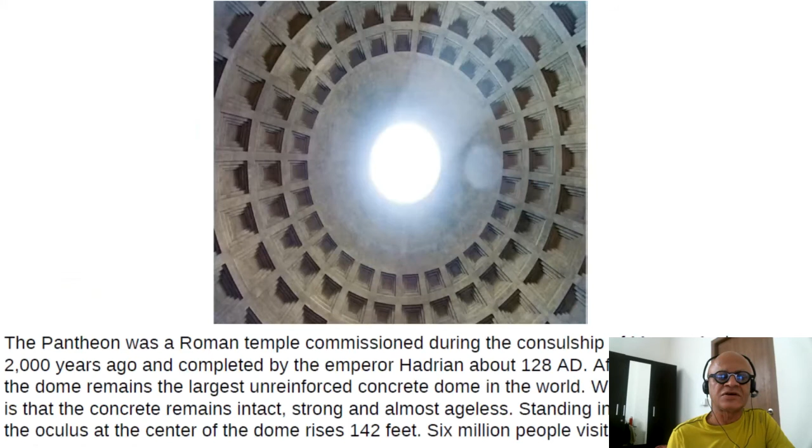Cement has been around for a long time. From the Roman Empire, the Pantheon was a Roman temple commissioned during the consulship of Marcus Agrippa 2000 years ago and completed by Emperor Hadrian by 128 AD. After nearly 2 millennia, the dome remains the largest unreinforced concrete dome in the world.

What is more remarkable is that the concrete remains intact, strong and almost ageless. Standing in what is now a church, the oculus at the center of the dome rises 142 feet. 6 million people visit it every year. Apparently the use of volcanic ash is what made it survive underwater, and current concrete wouldn't last this long, apparently. I don't know the details.

Annual CO2 emissions from cement in 2019, you can see the numbers here. China and India are going absolutely crazy with new buildings because of all the economic development and infrastructure, so they are obviously emitting a lot. They are producing a lot of cement and emitting 500 million to 1 billion tons of CO2. Maybe India is in the range of 100 to 500 million.

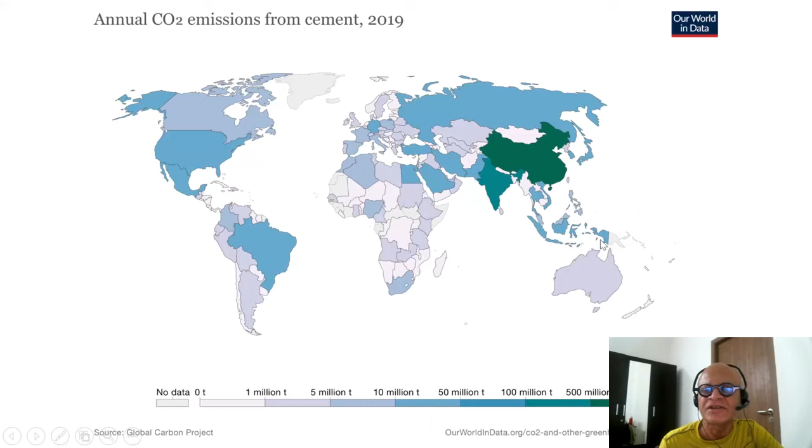And then there are other countries, rich countries, that are still having many buildings, infrastructures, and Brazil, Mexico, and some Middle Eastern countries, Russia and Southeastern countries, and so on, at various levels of emissions. Let's run through an infographic from Carbon Brief that I stole from the website. Reducing emissions from cement is the goal here.

So what is cement? Cement is the basic ingredient of concrete, the most widely used construction material in the world. So concrete is a mix of crushed rocks and sand and so on, which is held together by cement. Around 8% of global CO2 emissions come from cement production. Typically, over half of cement CO2 emissions come from making clinker, one of its major components.

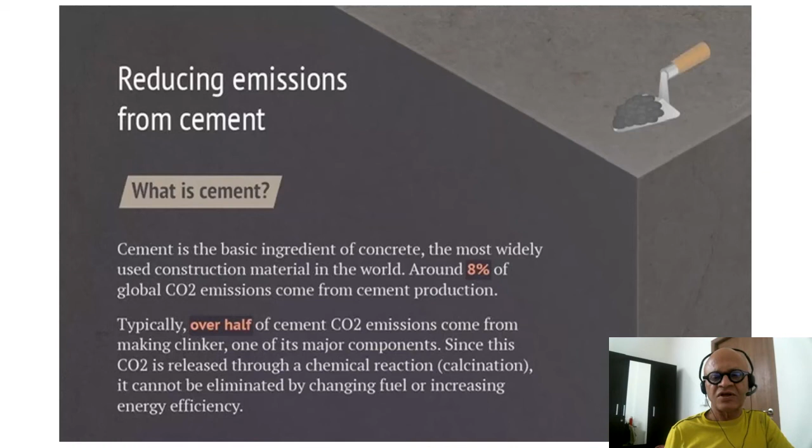Since this CO2 is released through a chemical reaction called calcination, it cannot be eliminated by changing fuel or increasing energy efficiency. So basically, limestone CaCO3 is blasted in a furnace, in a kiln, to remove carbon, which is converted to carbon dioxide and released. Carbon capture and sequestration is one idea, of course, but to get calcium oxide out of limestone, this process is calcination, which is very carbon emission heavy.

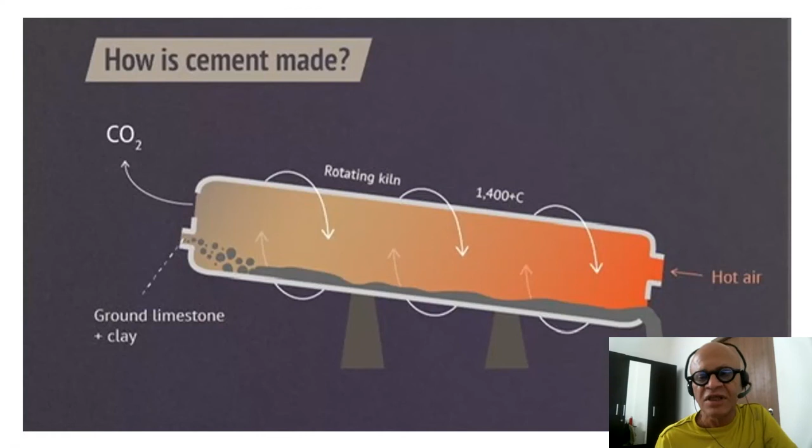Cement is made here, ground limestone and clay with the rotating kiln at 1400 plus degrees centigrade. Hot air is pumped in, and you get the clinker that's coming out here on the other side. And the Portland method is the most common method, which we won't get into. It's often referred to as Portland clinker. How can emissions be reduced?

So carbon capture and storage, as I said, emissions from cement kilns could be captured and stored. However, CCS technologies remain at the basic research and demonstration stages, and no effective scalable CCS has been applied for cement or clinker production yet.

Alternative novel cements include development of clinker-free cements, which could significantly reduce emissions. Some firms developing these claim up to 90% emissions reduction, while others say cements could even sequester carbon, so you can make them absorb CO2 from the atmosphere. So this is from Chatham House, reflected on Carbon Brief.

There are clinker substitutions. A proportion of clinker can be replaced with other materials such as fly ash and blast furnace slag, but this reduction of emissions is barely 5%, and I don't think it crosses even 10% at any rate.

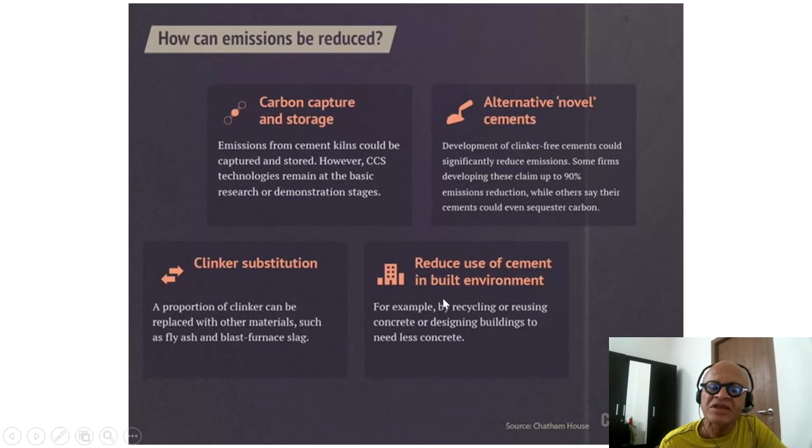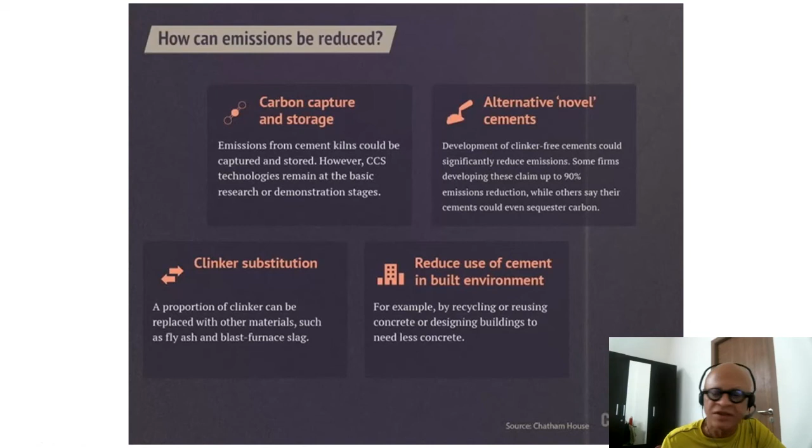Reduced use of cement in built environment, for example, by recycling or reusing concrete, or designing buildings to need less concrete. There are people who argue that steel could replace concrete and no need to use concrete, and so on and so forth, but no indication that concrete is going to be outmoded anytime soon.

To look at some more numbers in addition to the map we looked at from Our World in Data, million tons of cement produced here. Obviously China dominates. India is up here as well. EU, US, Turkey, and then rest of the world combined to be more than these big individual producers.

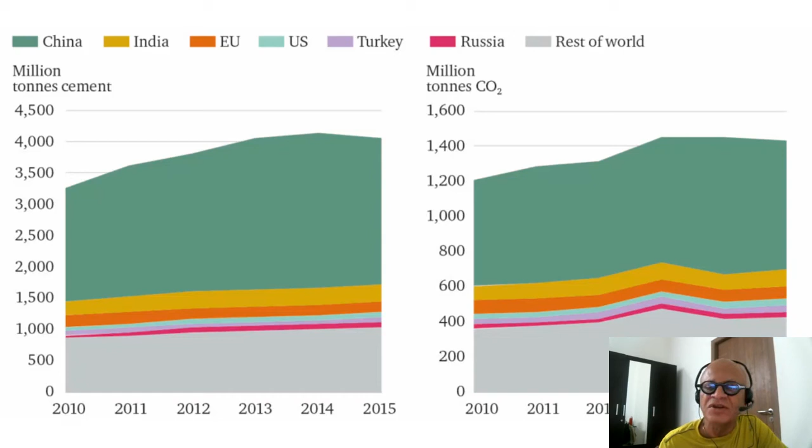Corresponding to that, there are million tons of CO2. China going from 600 to 1400, so about 800 million tons, and India 100 or so million tons, and down the rest of the world is emitting almost 400 million tons of CO2 per year.

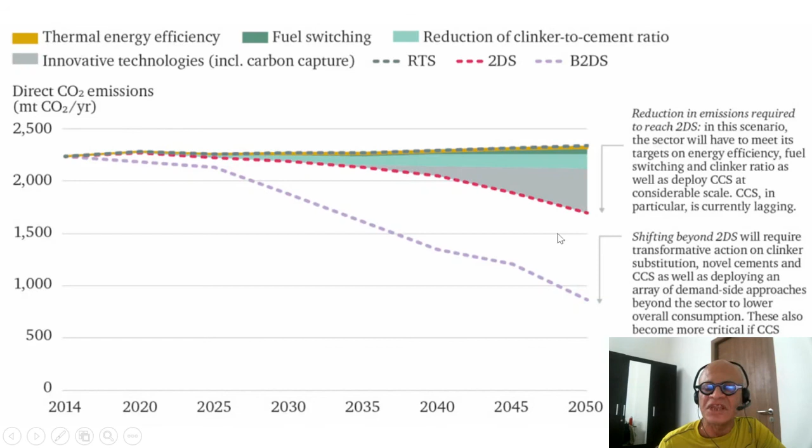Shifting beyond 2DS will require transformative action on clinker substitution, novel cements, and CCS, as well as deploying an array of demand-side approaches beyond the sector to lower overall consumption. These also become more critical if CCS proves too challenging to scale. Right now we don't know that. So this is the B2DS, beyond 2DS scenario. Okay, so in other words, right now the chances of reducing CO2 from cement production beyond a certain percentage don't seem too optimistic, even out to 2050.

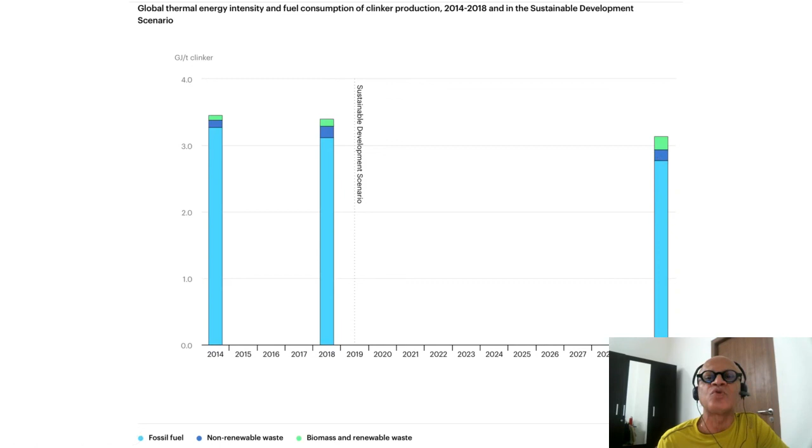This is from the International Energy Agency, looking at fossil fuel, non-renewable waste, and biomass and renewable waste for global thermal energy intensity and fuel consumption during clinker production. 2014 and 18 are shown here. Not much of a jump there in terms of gigajoules per ton of clinker production, but sustainable development scenarios for the future would require that fossil fuel still continues to be used, and there is some increase in both non-renewable waste and biomass and renewable waste. So again, not a very optimistic scenario for the future.

So in summary, because fly ash is a byproduct of burning coal, each ton created is accompanied by 15 tons of carbon dioxide emissions. Using fly ash in cement can offset only 5% of those emissions. Even so, if 9% of cement production between 2020 and 2050 is a blended mix of conventional Portland cement and 45% fly ash, 6.7 gigatons of carbon dioxide emissions could be avoided by 2050. The production savings of 274 billion are largely a result of longer cement lifespan.